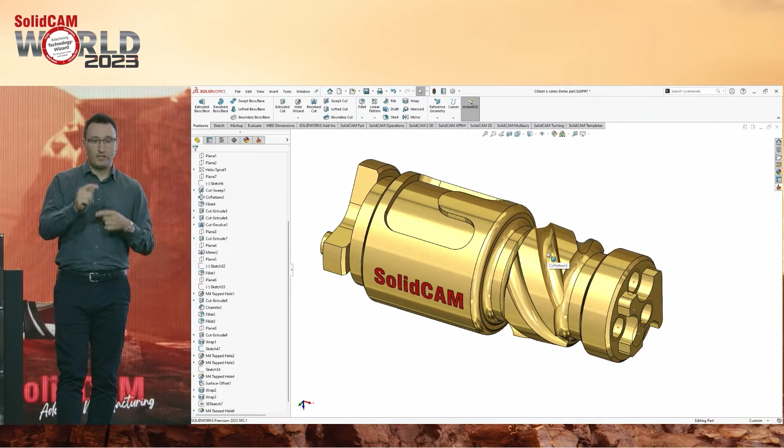So I'm going to open SolidCAM, and I'm doing it the standard way. Do you want to save it? It's not saved - okay, I hope that's fine. So, pretty standard, I'm just going to make a demo solid, and we just click OK. Standard, nothing too special.

The very first step, you all know, I always mention - whenever you have SolidCAM and all your machines on the floor, the very first step you need to do is select your proper CNC machine. Here is the list of all your machines that you'll have on your floor.

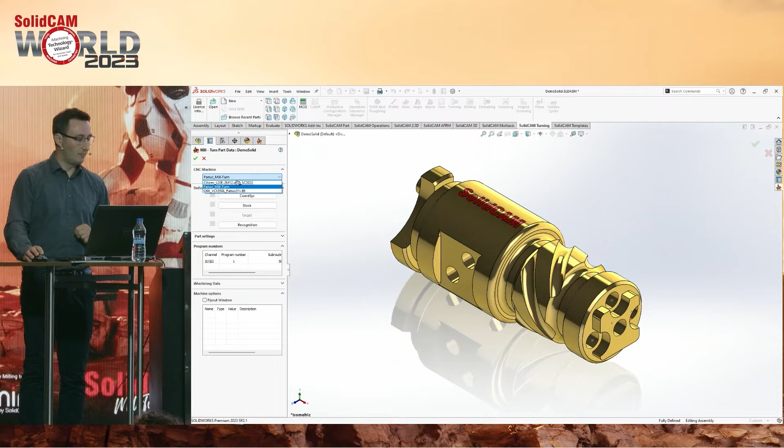I'm going to pick one of them. In this example, I'm going to use the Citizen machine, the same one that's also in Schramberg at the Technology Center, the one with the ATC. So it has the spindle with automatic tool change, together with the B-axis. You've probably seen this on many of these videos shown here.

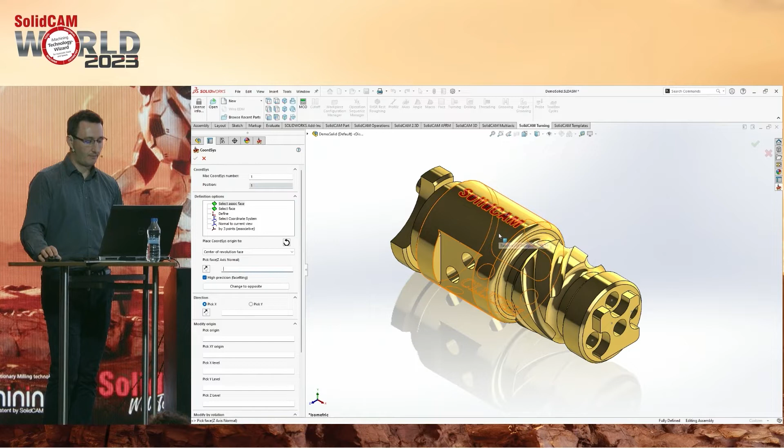And what's very important, I'll pick and select the coordinate system - it'll be there just for programming the way I like it, so my x-axis goes towards some geometry. It's not really necessary to do this; I'm just showing that any kind of manipulation with the coordinate system is possible. Many of the elements I'm going to show, I'll show shortly because of the short time, but it's important to show that any coordinate system manipulation is possible.

Now, what you'll see in the next moment is all automatic. Customers like to see something happening in the background, but while this is happening, try to explain to them what's happening - so the coordinate system is automatically created, stock is created for you, and the envelope is automatically created.

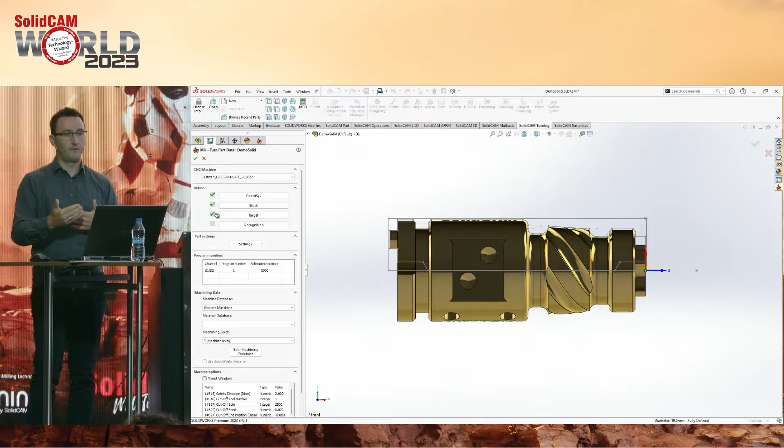You can see at the left that everything is done already, per your settings, you don't need to do anything. He always worried, but I want to change something. No worries, if you want to do something manually, you can always change that inside the settings.

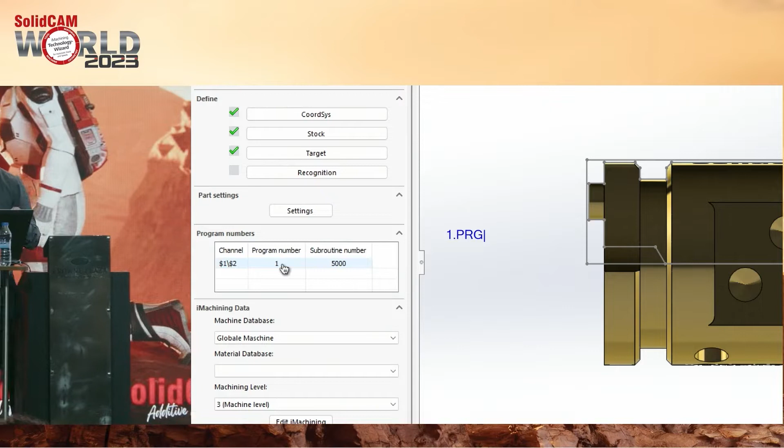What you have here is the program number. Whatever you type here will be the PRG. This is a small moment where, when you know that this is Citizen, you know that the output will be PRG, and then you connect it. This is a small detail, but he immediately speaks with someone who understands also the machine, so now you are getting connection with someone who is technical as well.

Now we have here also some machine options. I will not bother you with them, but it's good to show. This is important, okay, so you explain him. So you need to also have a technical guy who knows the machine well. I'll just click OK, and that's all you need to do. This is usually the process of just 10 seconds, and that's it. You don't need to do that all the time.

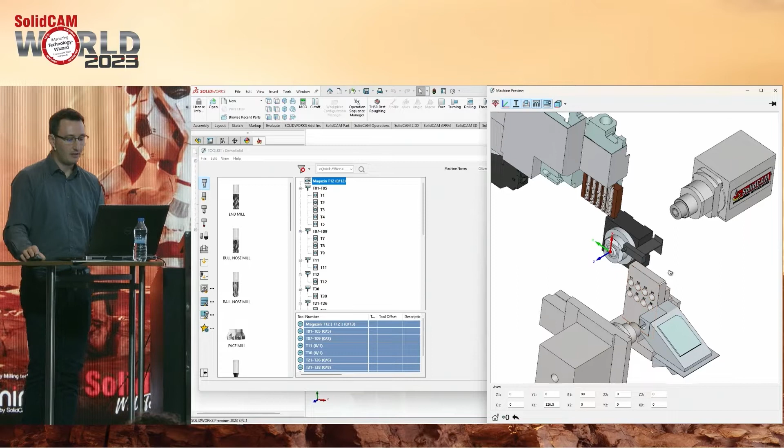The next step, I like to open my toolkit. Inside the toolkit, I show the machine. Machine preview is something that none of the CAM has. This is your true kinematic of the machine, and at any step of your programming, whether you are in the toolkit, in the job setup, or in MCO, you have a possibility to open machine preview. It gives you the kinematic position of your machine and allows you to define anything you want in the machine environment.

And then he says, okay, you see, there's no tools here. What is important, and I mentioned in yesterday's presentation why our toolkit is the best in the world, is because it has such an easy way to manipulate with the tools, fast change any tool layout. This is extremely important in the Swiss.

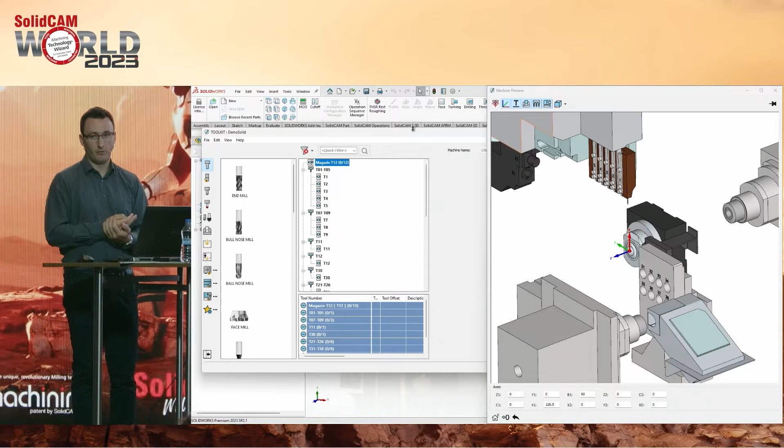What I'm going to do, I'll just load it. I have predefined this, and with a simple click, mount all tools. Maybe you can all see it over here. I will unzoom it, please pay attention in the machine preview.

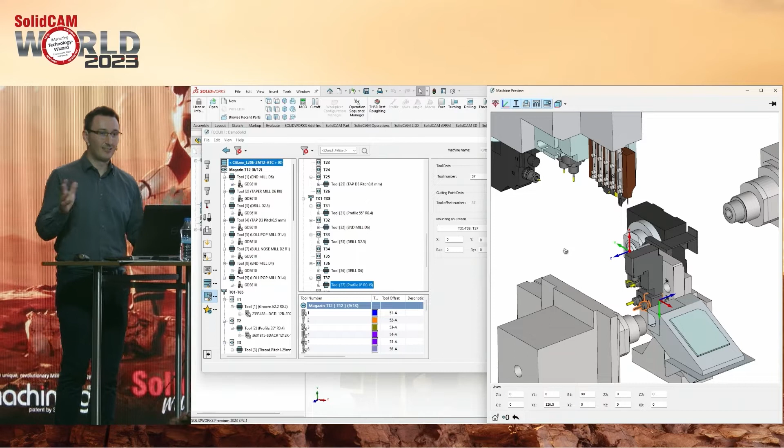This is already, they say, wow. They're already impressed here, but don't stop here, there are so many features that you can show that can be used.

For instance, you can say, you see these 3 tools over here? 2 tools, but 3 stations. If you're willing to exchange them, no problem. You don't really have to click on the tool itself, you can click on the holder. You have this option, select tool components, which is going to highlight the specific component in your library, and of course you can select the whole assembly.

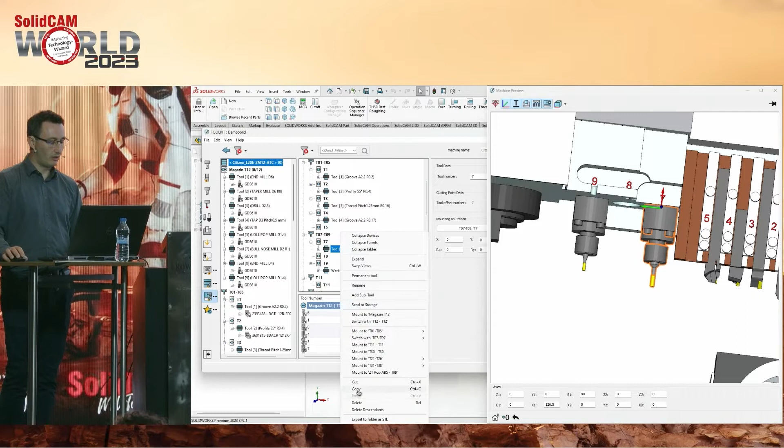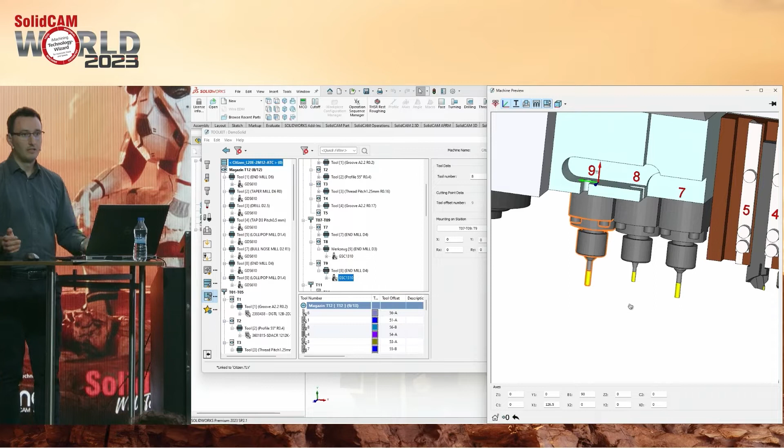So you want to put it on tool number 7, just drag and drop, and now it's on tool number 7, okay, that's fine. But look, what I want to do also, I can just copy, I can do paste, it's so simple. But what if I want to exchange number 8 with number 9? No problem, just go to 8, you have it here, I want to exchange it with number 9, switch it. And where is it? Ah, here. Done. So this is what customers like, that easily you can switch your tools.

You can do that also for any of those over here. I can just select it, just move it to the 34, no problem, there you go. So easy switching layout, customers don't like to waste time switching the layout.

What you can also show, I want to change the diameter of those tools. So this is not what I actually like to see here. You can show him that this is everything, it's live, so everything you do is presented live in the preview. Okay, so this is the tool layout that we are going to use in this demonstration. All right, so that's it.

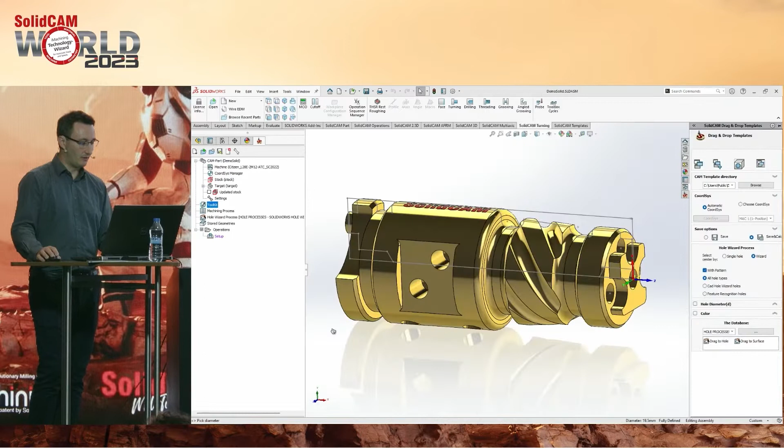So the next step is the setup. Inside the setup, we are talking about the machining length. So here's your part, going to the maximum machining stroke, and I can tell him, hey, what will be your Z limit for your per stroke? Here it is, you can dynamically see it.

But not only that, you can also see where you are going to clamp your part on the subspindle, for which I'm going to use the MAC-2, and dynamically just place the value, and here will be my catch-up position. This will be extremely important when I define my MCOs, you will see that later on.

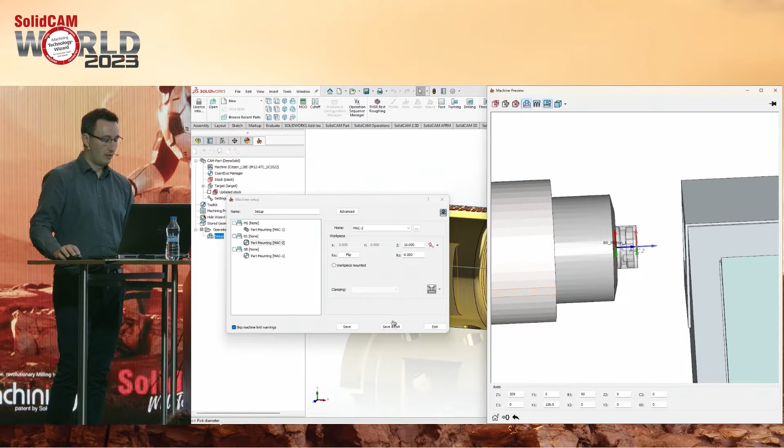And exit. At this point I stop because I try to explain, although these steps can be done more or less automatically, with simple clicks in 10 seconds you already start doing your operations. But for demonstration purposes, I'm trying to tell him, look, this is what we have, these are the steps in case you want to do something, change also manually.

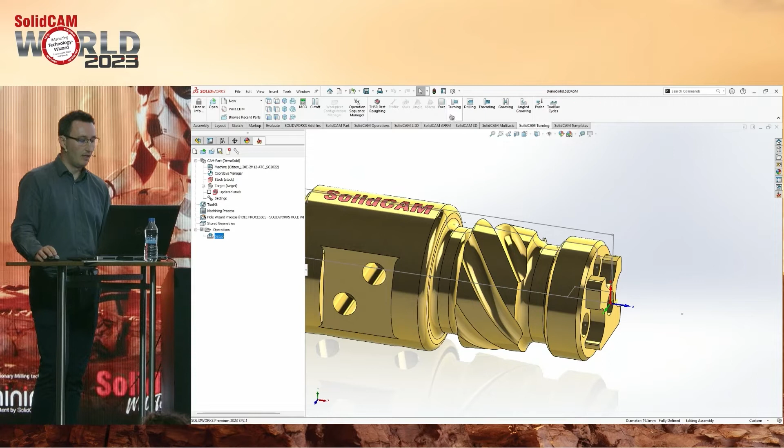As there are so many geometries here, it will be completely unrealistic that I define all of them. I could use automatic features as well, but I will just define some of these geometries, not all of them, but to emphasize our integration and associativity. I'll go through the interface, showing that on top you can find all the SolidCAM operations, starting from 2.5D, automatic feature, 3D, multi-axis, turning, and I start with simple facing.

Every one of our operations in SolidCAM is within this single window. No matter what job it is, it looks pretty much the same. Only the parameters of each of these segments change. So let me just define simple facing.

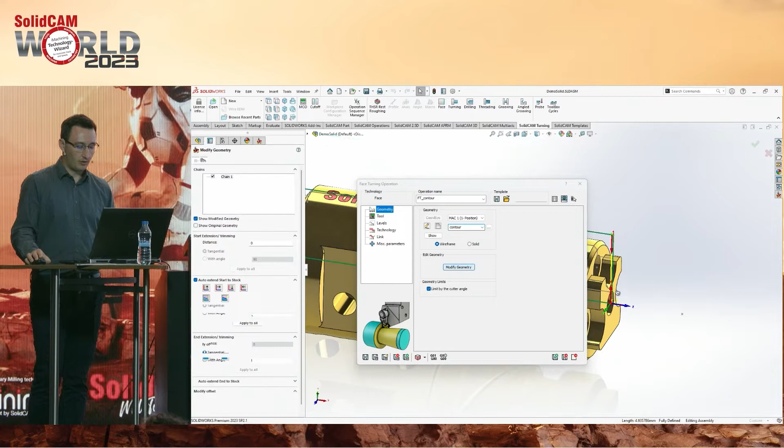I'm just going to accept it. I'll make sure that my geometry goes all the way to the bottom with auto extension to the end stock, and I'll click OK. You may also change the operation name, and now it's time to pick up my tool.

I am showing this also, I showed this also yesterday. You can pick any tool, not going through your tool page and just select it, which will bring you to a toolkit. That's fine, but it is so much more convenient. You know, Swiss-type machines can have 30, 40 tools, so you have a huge list, and finding a tool in the list is not convenient.

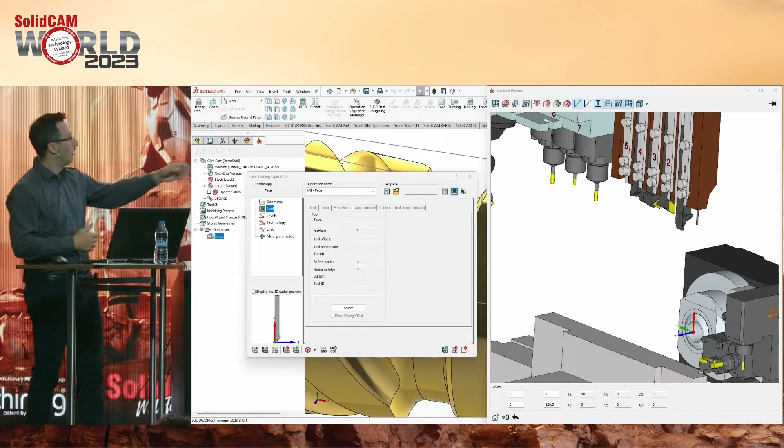Use the advantage of machine preview. You can just easily right-click, select tool component, and it's going to pick the tool and show it here on the left side. It's done, and that's it.

Let's go further. What I also like to emphasize is our parameters and the picture, how intuitive our software is. By just going to any of our parameters, I don't even need to click it. You just move your mouse over it, and you see at the bottom the picture that describes this particular parameter. SolidCAM has at least 5,000 images which describe each particular parameter.

That's intuitive. Yesterday we've seen that we also start to support movable pictures, GIF files, right? So we will work on that as well. I go to the technology, I can go to any of these parameters and convince the customer, look, anytime when I move this, it changes, right?

What you can also do, it's easy to learn. I mean, yes, it is intuitive, but if you want to find something more, there is online documentation for you. So on the top you will find this question mark. You can always click on this and move to a particular parameter.

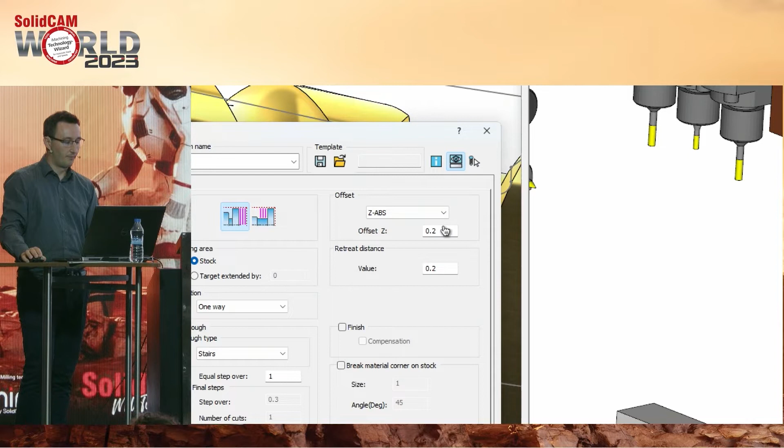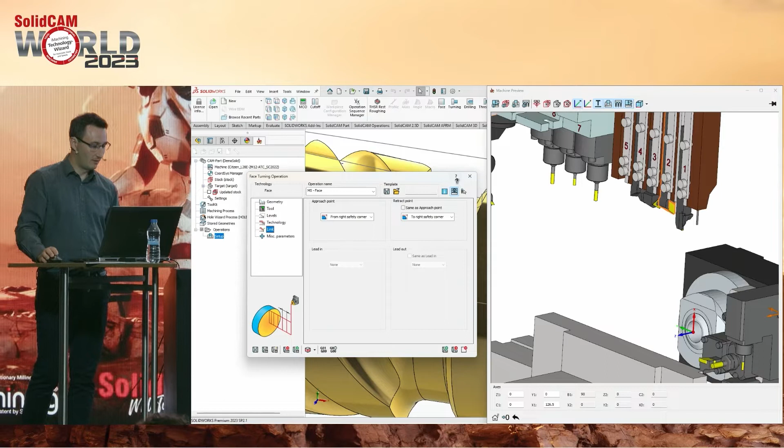What, I don't have the internet? Let me try again. Apologize for this, it should probably work because there's internet. It should guide you, let me try again. It didn't work with that parameter, but if you go with the question mark to a specific parameter, we will drop you to the specific section where you can find more information about that parameter.

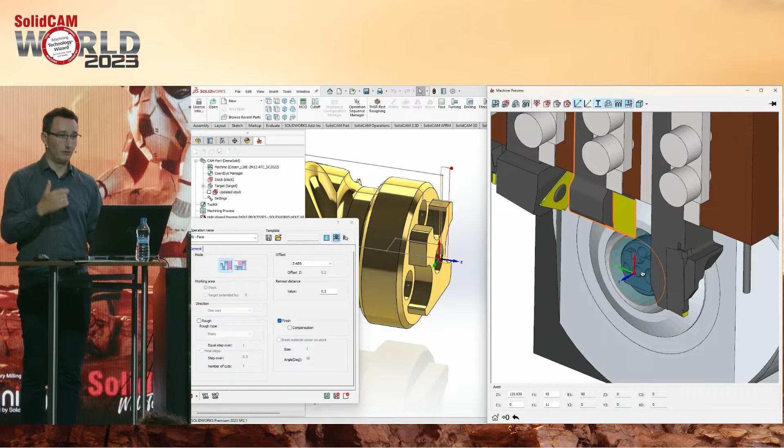All right, everything is defined. I will just go with the finishing, save and calculate. What is interesting happening at the moment is, hey, look at this, you can dynamically see your toolpath. But you can also see where this particular tool and part is at this moment kinematically in the machine environment. Again, emphasizing the machine preview feature.

Right, let me define a few more operations. I'm going to go outside diameter turning. I'll do this a little bit quicker this time, but I will define it with a solid. I will click on this geometry, for instance, one of the last.

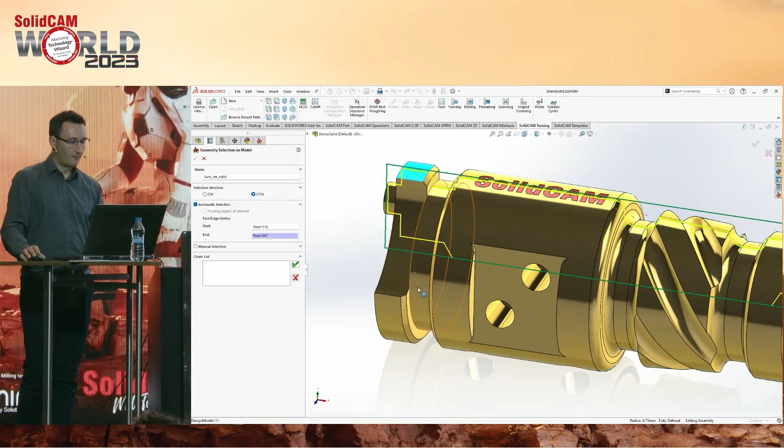Maybe I don't see it here, let me try it again. So over here, I'll click on this. There you go, so all this chain is selected. Don't worry, I'm not going to machine all of this, but I have a possibility to modify any particular geometry.

This is extremely important if you have the guide bush. The guide bush moment is important as every collet can be a different size, of course. So you cannot really machine the complete part within, let's say, one operation, okay? But for this demonstration, I just mentioned this, and I'm going to, of course, clean the whole part.

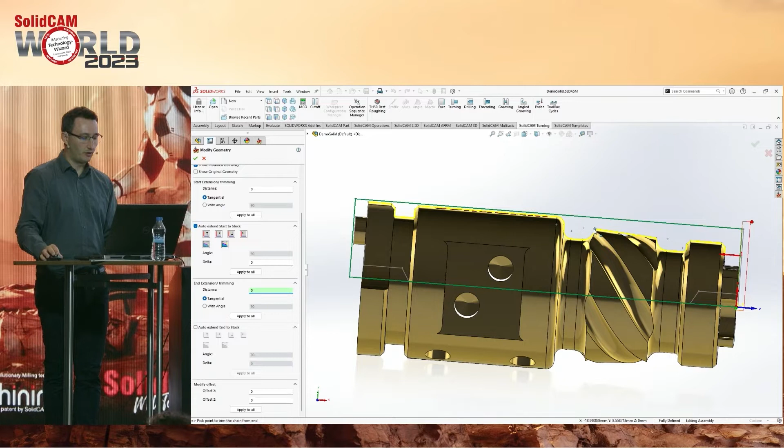What is important to show is that you can just go over here and trim your toolpath to any point. Look, just by clicking, it trims your toolpath. I can just go over here and click over there. That's good. Now I can go and also auto-extend my stock within the angle.

I can say here -10, which is very nice to finish some geometry. I'll click OK. I can also mention here it's OD turn. I can go to same of my tool. I will just reselect it.

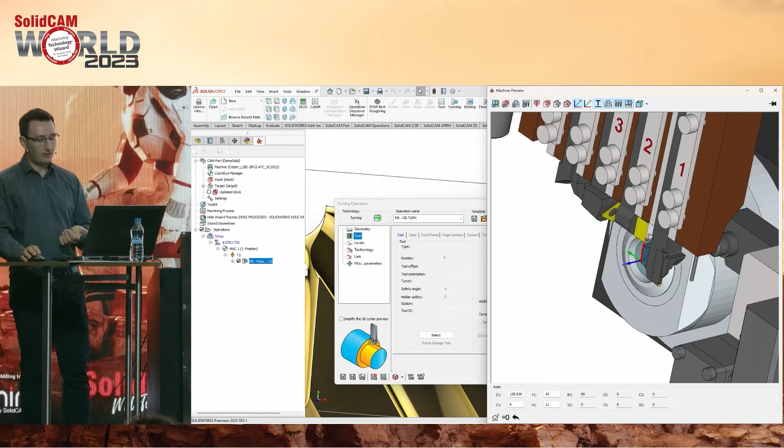Here it is. What is interesting also to see here, is that my next job is not even calculated. But what I can see at the moment is that where my operation was before I selected.

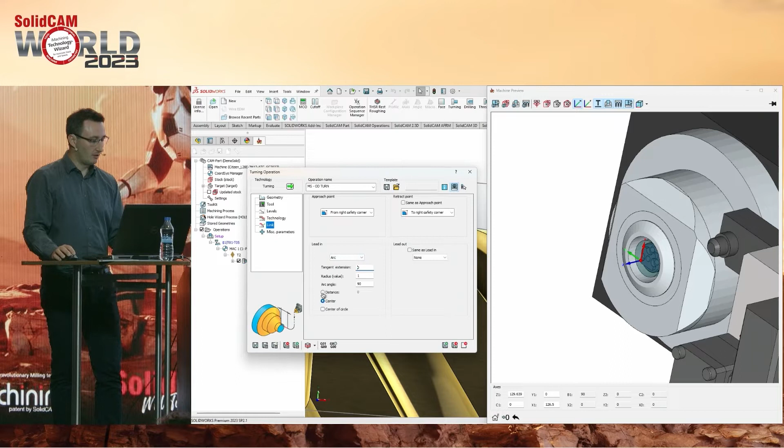I will just this time go to the technology. I will do it with rough, make corrections - this will be all fine. I will not change too much of the things. I will do it with the finishing. I will go to the link. I will do approach with the arc and hit save and calculate.

It's so easy. It's so nice, right? But what we can do more?

For instance, we have a very nice option here in the technology. If you go to the general, for the guide bush purposes, there are sometimes situations when you really need to go more than allowed by the collet. So in such cases, you need to break the corner material on the stock.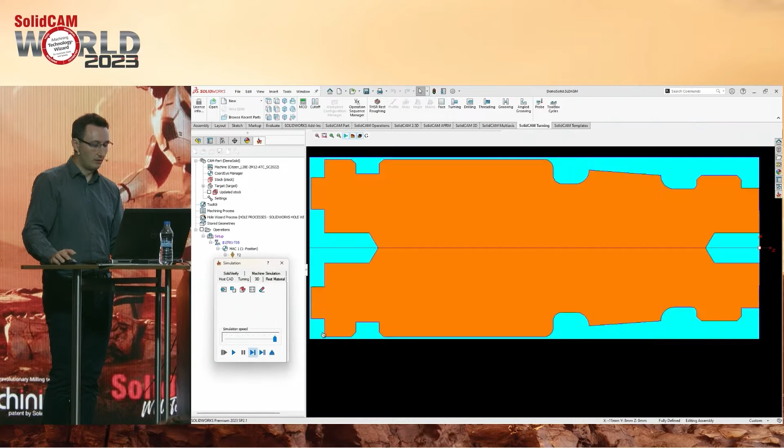And that's so good that we have this option. I really like it. You can put any parameter here, and it will really cut. It's like so. I will simulate it. I'll go to turning, make a simulation. I will just run it fast.

Here it is. I have this break over here. All right, so what I can do also, I can just say non-descending mode, no problem, calculate. It is so fast. It will not go here to those things, right?

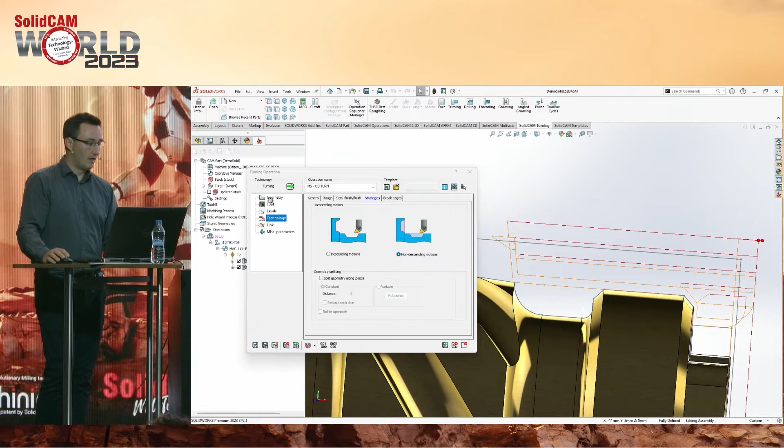I will go to the geometry, modify geometry. I want to now cut all this geometry, just click OK. Because of the time that we have, I'm just going to machine all this stuff here.

In addition to this, I'm going to make a grooving operation. I'm just going to turn off this job. And I'm going to select from here to here. This is my first chain. This is my second chain. And my third chain.

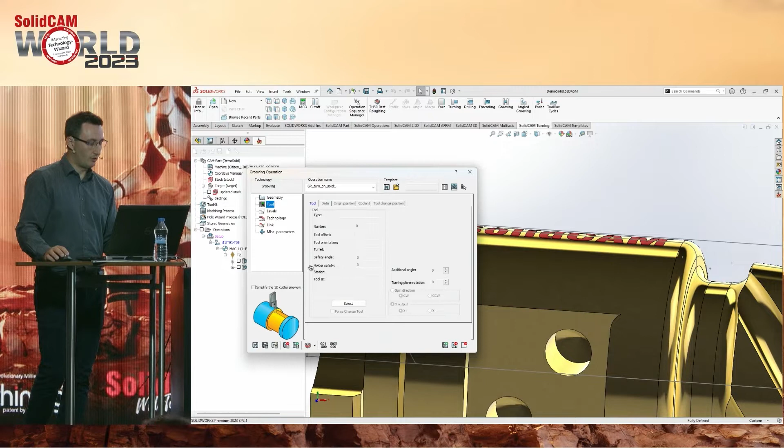Perfect. Again, I will go to my tool. I will select, but this time different tool. I have the tool over here. What I didn't mention here is that all of these shanks - you see that they are 3D model imported ones. Good also to show during the demonstration. I'm going to select it.

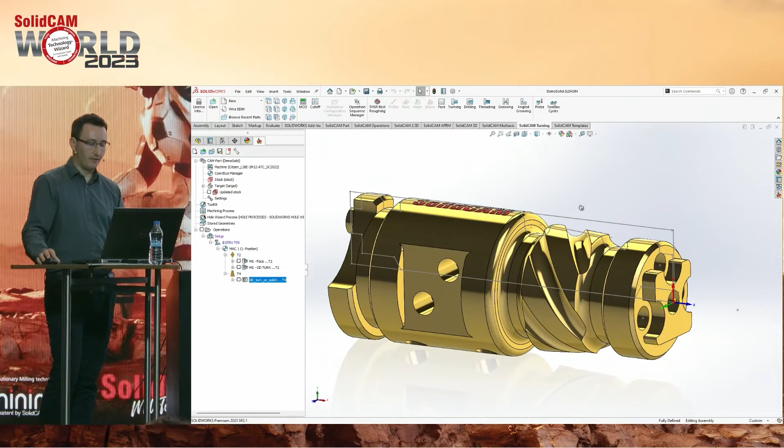Okay, so where we go further, now you start to say, look, but we have so many milling operations. Let me show you. I always like to start with the one from the face. And I will go to our 2.5D, and I'm going to use our pocket.

All right, I will click on the chain. I want to define this with a chain. And what you need to do is simply click on the surface. It's going to find all of these. I don't need to do anything special. So, trying to show how easy it is to do this.

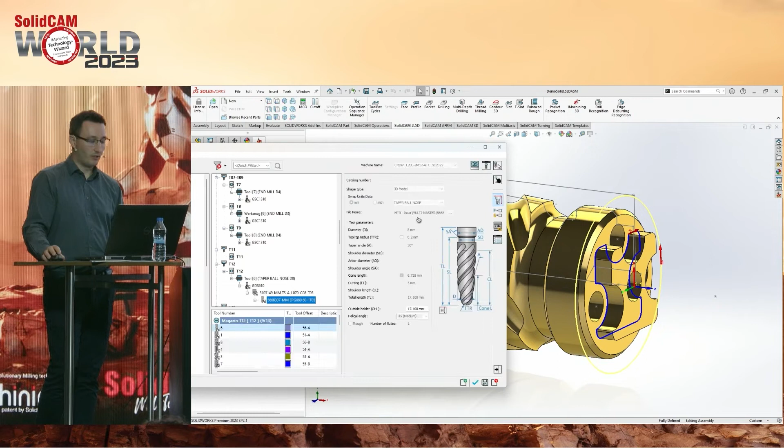But this time I'm going to do this with the B-axis. My B-axis, here I'm going to find a tool. It's here on the top. 4 diameter end mill, like so. I'm going to open my preview.

Here it is. I will go to my levels. What you can see here, I have my upper level and I have my pocket depth. Both of these sections are green. Make sure you emphasize on your demonstration: hey, why is this green? Can you guess?

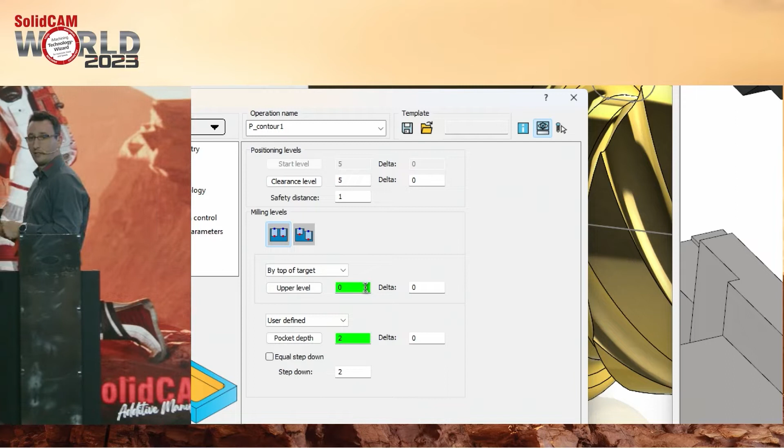And he'll say, oh, you define everything correctly. No, no, no, no. It means when I click on these particular surfaces that they are associative with this geometry. As he said, what is associative? You will see very soon.

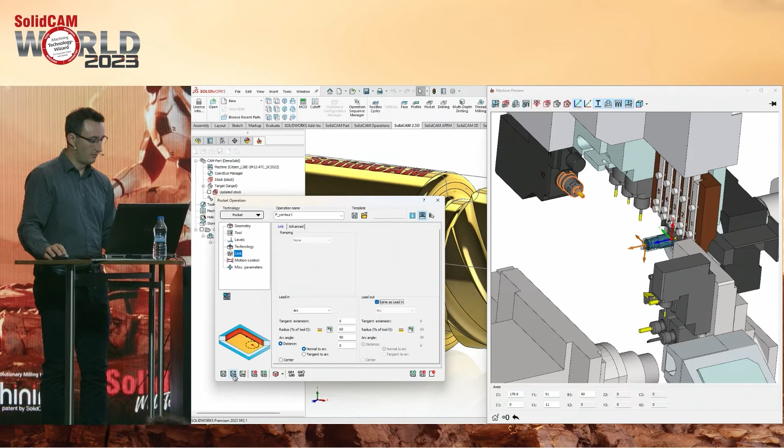So I'm going to calculate. I think nothing - oh yeah, I'm going to just define the finishing and wall finish only. Maybe some link, arcs approach, same as the lead-in. Calculate, and the B-axis on the spindle is used. Showing the toolpath - the toolpath is here.

All is good. And now, what I usually like to show is, okay, I have one from the face. Good. Hey, do you have a polar interpolation cycle? And he said, what do you mean? Do you have a cycle in your machine G12.1? Oh yeah, I have it.

You want to run it on this machine? Yeah, but I never tried with a B-axis. Yeah, we can do it. We verified that also - the post-processor supported it very well. Oh, I would like to try it.

So you go to the motion control, just turn on the fourth axis here. Just click it, and you can already see that it repositioned. I can calculate and say, can I see a G-code? No problem, I'm just going to generate a G-code. Click OK.

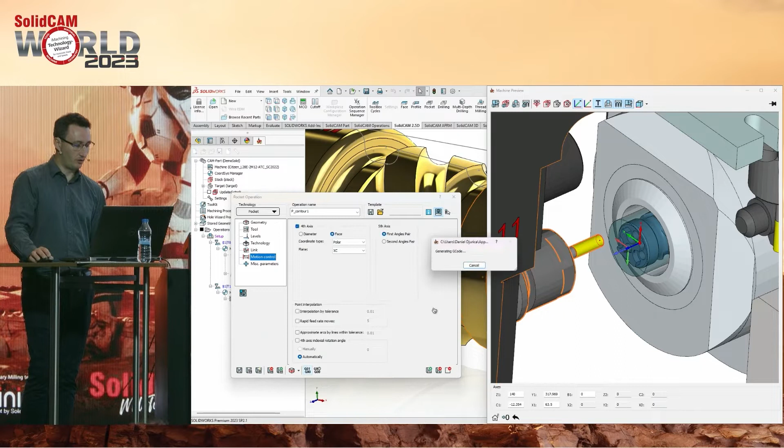And your G12.1 cycle will be there. He'll say, wow, this is amazing. Okay, you don't want that?

No problem. But you also have the option to control any of your C-axis positions. Here at the bottom, this job is currently on C0. If you want any other angle, just put in the value and it will be there. At the bottom, you can see the C-axis gets updated.

But that's not all. Now it's time when you create the first milling job, it's time to show drag and drop. I want to show you something you've never seen before. We define this job over here, but I would like to define this job on this surface.

I don't need to create any coordinate system. It is done.

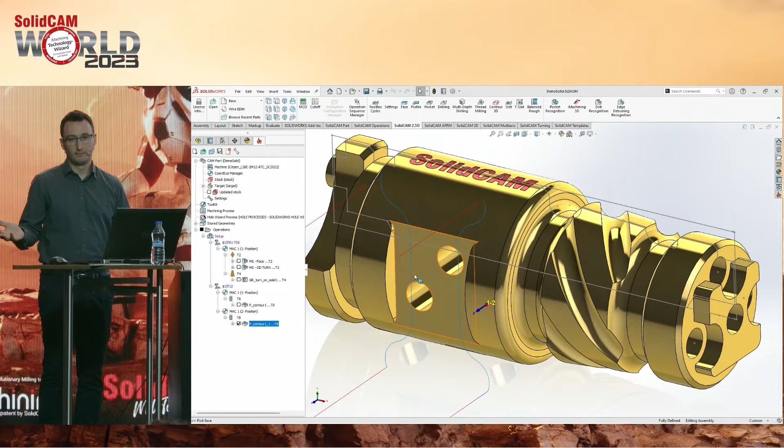What you can eventually do, maybe you don't want to do it with your B-axis. Maybe that's also okay. I will disable the preview.

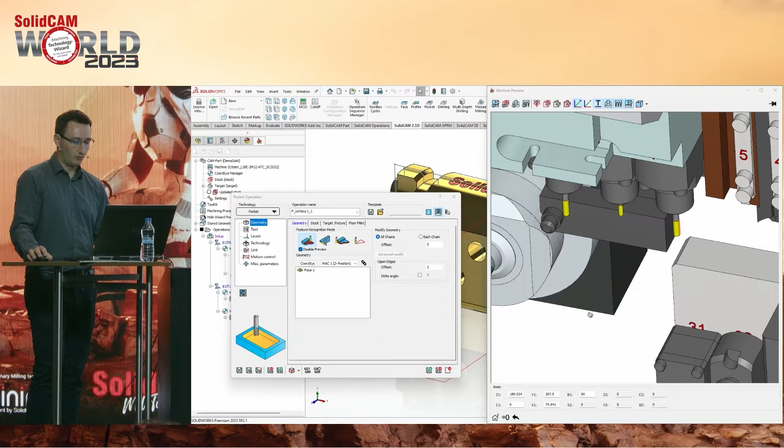But for instance, I would like to take this tool. No problem, I'm going to do it with this one. Save and calculate. There you go, now I'm using this tool for this specific job.

Okay, what's next? Two jobs, it's okay, let's move forward. My next job will be 4-axis simultaneous. Now this is a very simple geometry here, indeed, but there are a couple of things I'd like to mention when showing the 4-axis.

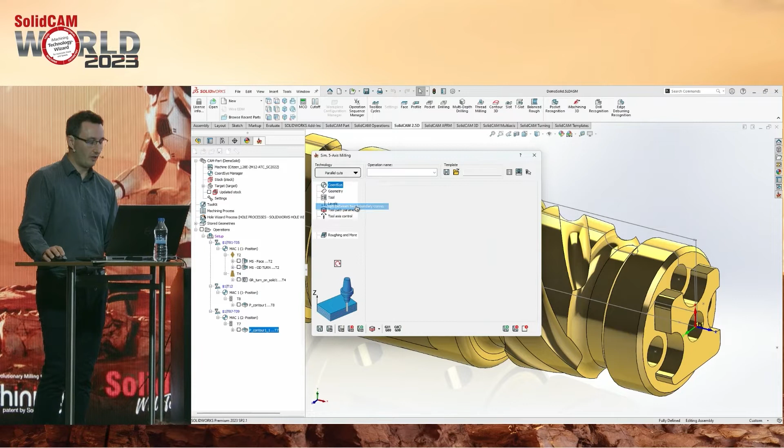Every customer knows how the 4-axis toolpath looks like, that's sure, but let me mention a couple of technical things here. I'm going to do morph between 2 boundary curves. I'll click on geometry, it's clear that my geometry will be this surface.

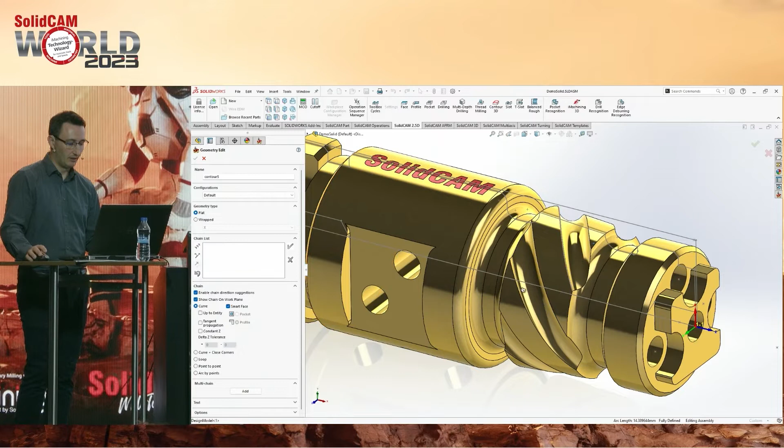I go to my tool. I'm going to select my bull nose mill in this case with the B-axis. Is it this one? Yep, exactly this one, I'll accept it.

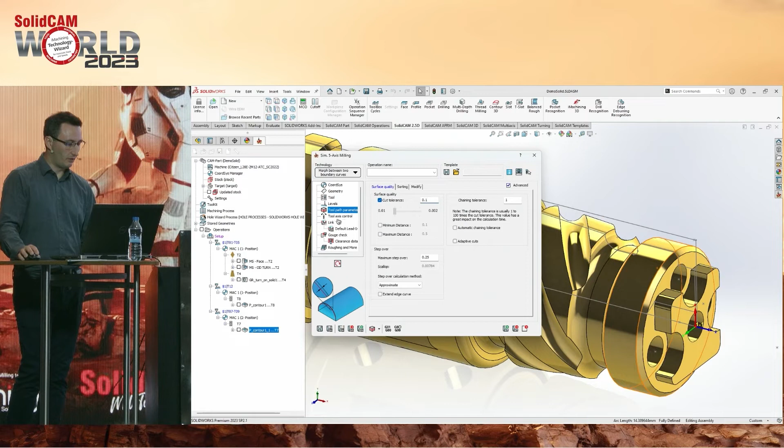I will change mine to the cylinder, going with a radius of 10, or maybe 12 I can do, 2 here, 0.25, cut tolerance. Just for the calculation time, I'm just going to reduce it. Rotary, point here,

and just calculate. Let's see what is the toolpath. Pretty good, not so bad.

Of course, what I'm doing at the moment is calculate the toolpath, add some lead in. So how difficult is it? No problem, just use the lead in. Here, I don't want to use a default, go to vertical. Look, save, calculate, it is there.

You can, of course, I have these retracts. I would like to get rid of it. No problem, let's go here. I would like to do a one-way.

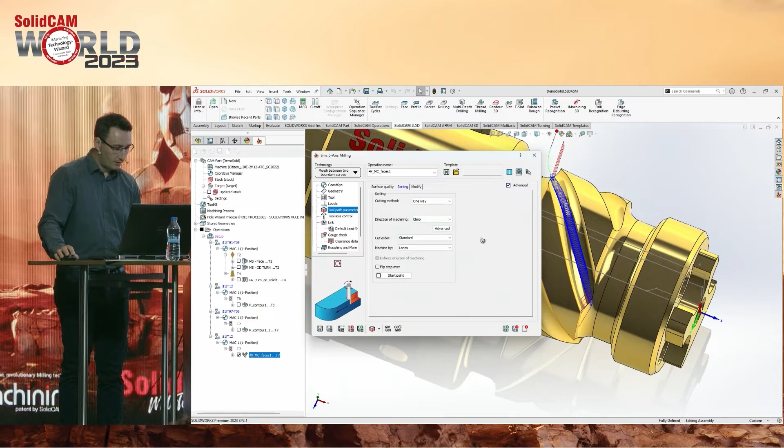I will go with, let's say this is okay. I will just say calculate. I want to do it one way. This will be fine, and if you're satisfied, I go with the roughing.

And I want to do a depth of cut, 2 here, 0.5. Calculate, and show him this toolpath.

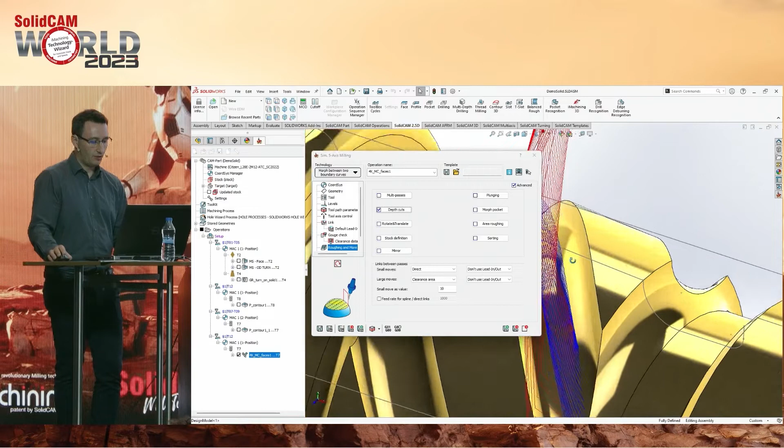That's it. Okay, I want to also rotate and translate, no problem. I'll do it 5 times. My rotation angle is 72. Calculate, done.

Okay, so what is this technical stuff that you want to mention? You know, usually Swiss-type machines come with a very small memory. Just generating this G-code will take about 20,000 lines of code. Very often customers are buying a machine that doesn't have a huge memory.

So it's important to show that, hey, look, there's something here that we can output as a sub-program. This is very important to mention. No problem, calculate, generate the G-code.

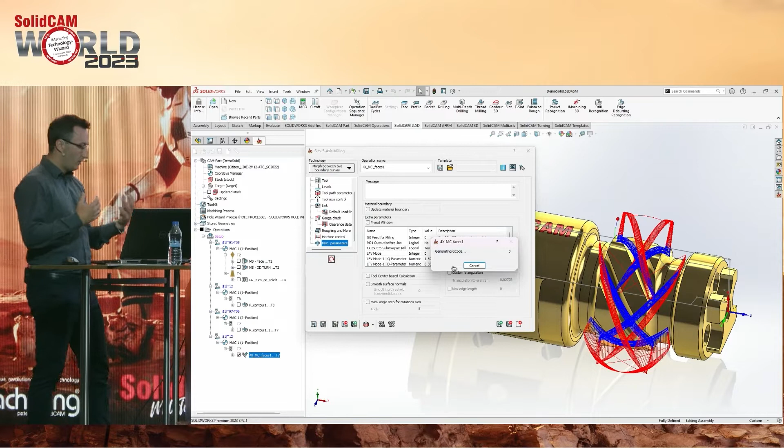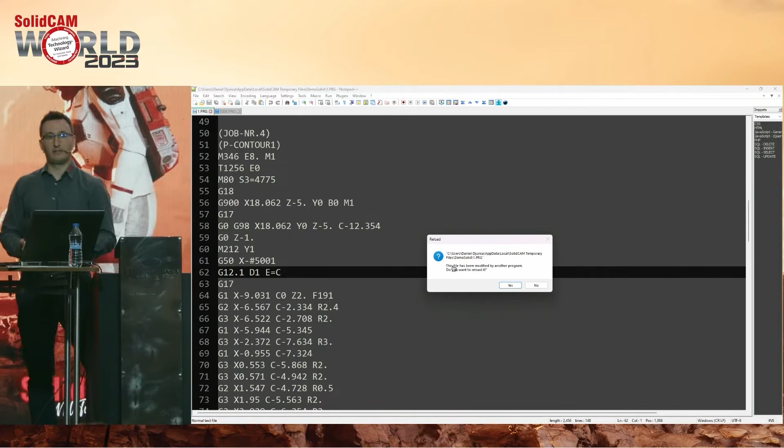And what you're doing here is, hey, maybe he's never run any huge G-code, and now for the first time he's going to see thousands of lines. Obviously this is the 4th axis, but he's never run it from the CAM, right?

So I have the main program, you show him the main program. Here I'm calling the sub-program, and here's the sub-program. So those are small technical details that also buy a customer's opinion, okay?

Do we have something more? Yeah, there are more jobs that I can add here, of course. But let me go towards the MCOs.

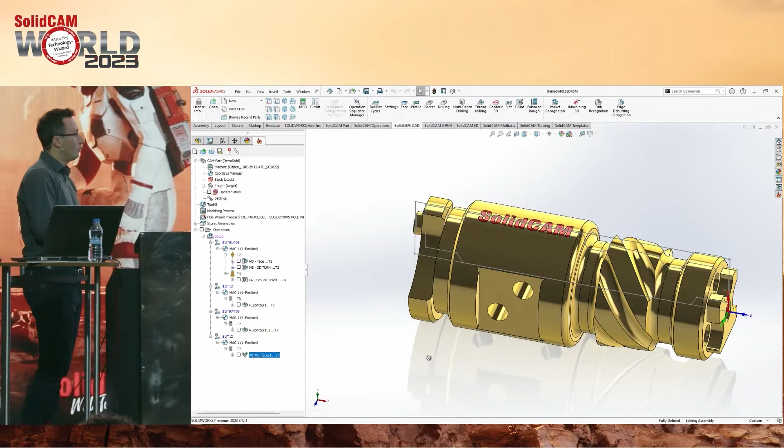In this process, I would like to make a cut-off operation. Of course, Swiss-type machines are very complex. You need to turn on the spindle synchronization at the time when the part is clamped. You need to turn on axis synchronization—it will go into superimposition mode. A lot of things. This is something the customer considers, like, okay, I want to define it very fast. I don't want to lose time with it.

You can show him that he can create a process template. I'm inserting all of this stuff with a process template I already prepared, and I have the pickoff cycle. All of these operations are there. I'm just going to click OK. I have one cutoff operation for which I will not define anything—I'll just click OK, and all these MCOs will be there for us. And say, whoa, here it is.

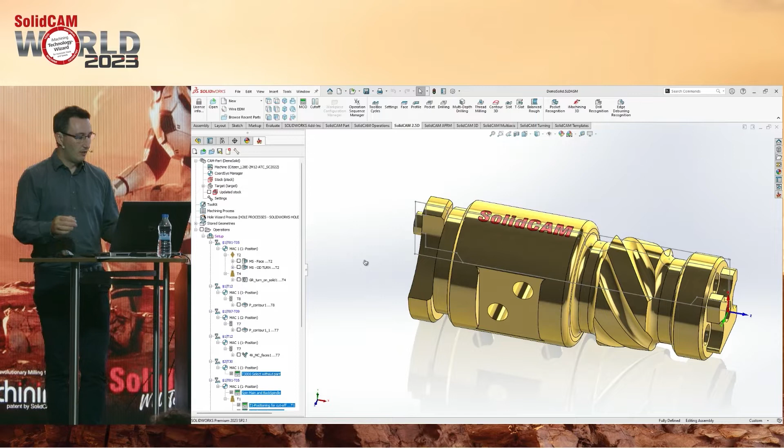That's all. I will go through these MCOs a little bit to show you what they are. But for this, I have one cutoff operation for which I'm going to define a job. I want to do it like so.

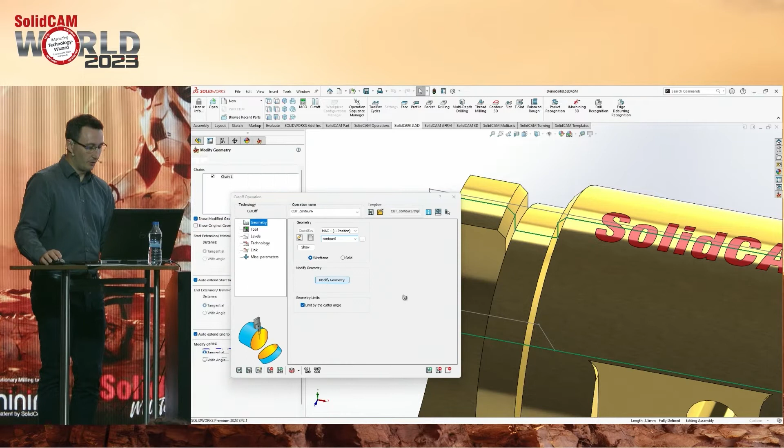I will just modify my geometry, make sure that it goes all the way down, click OK, select the proper tool. On most of the Swiss type machines, the tool is number 1. And the offset is 0.27 calculate.

All right, here it is. Here is the job. So what are those operations here? Let me show you a couple of them. I will go to the Z1 positioning for the pickoff, and what we always offer is our MCO operation—we always give a user all predefined MCOs for a specific machine. This one is Z1 prepositioning, and again, what is good, you have your machine preview.

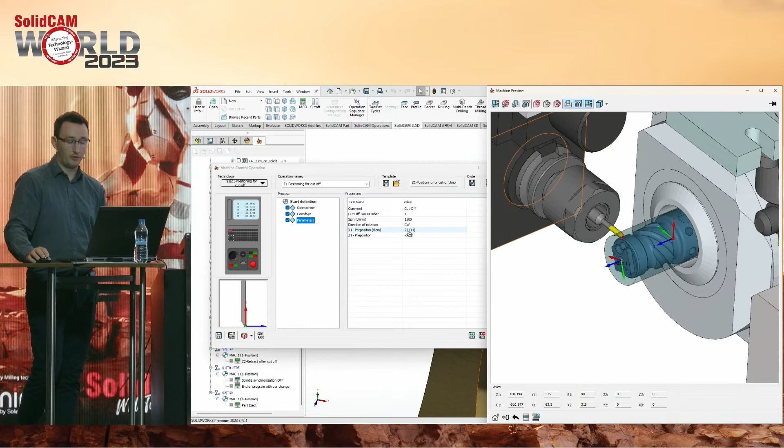What we always offer is the last position of my previous tool, and what I would like to have is my preposition on the X, which is 22 in diameter, and I have a Z1 position of 50.2. My part is 50, so I go with 0.2 as well. So I'm just going to click—there you go. This is my predefined cutoff position, and that's it.

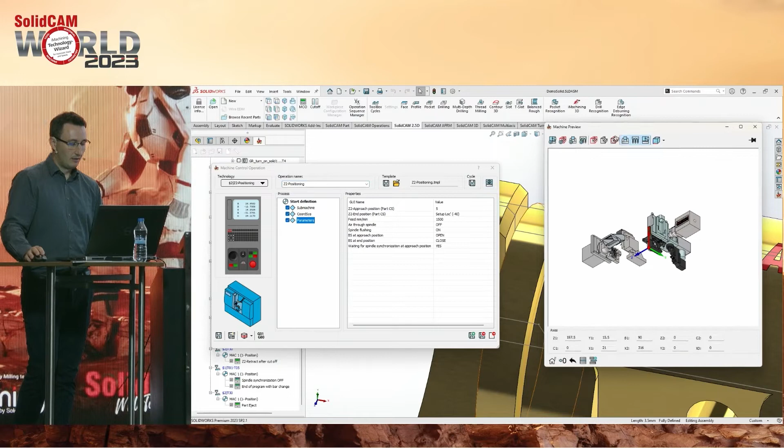Okay, so what is also interesting? Z2 positioning—look at this. It's my pickoff cycle. My part is ready. Everything is okay. I have here a position, pickoff position, 5 millimeters exactly. I'm pretty sure that this will not hurt anyone, so I can go 2.

Oh, I have my end position, which is my setup location. I said, what does this mean, setup location? I go and click and show him—do you remember my setup when I showed you that this was like 10, and then, oh, this picks automatically? Yes, absolutely. So you go to your setup, you remember this parameter, okay? So you want something else?

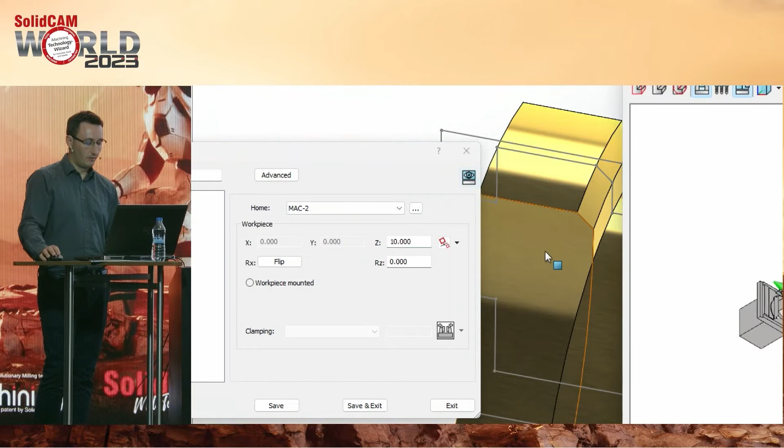No problem. I'm just going to zoom to the part. You can also use this icon, by the way—it's very handy. So you can just click. For the sub spindle, it's here. And I'm going to change the position, obviously to a different clamping position.

I will go to my prepositioning parameters, and hey, look, it automatically changed. You don't need to do anything here—everything is done for you. So, automation. I click new clamping position. And for the end...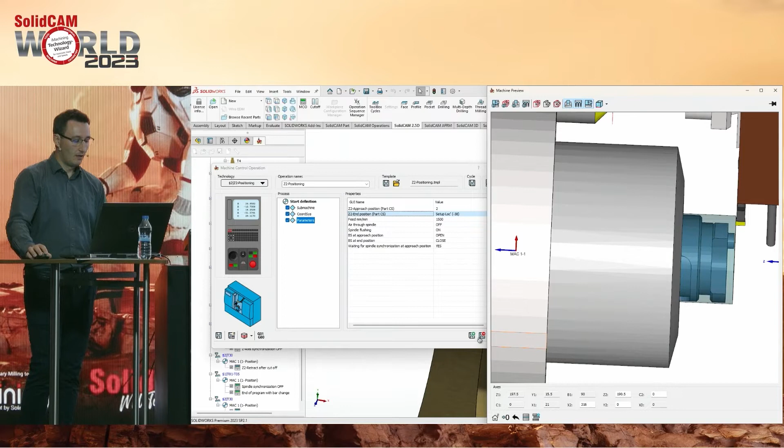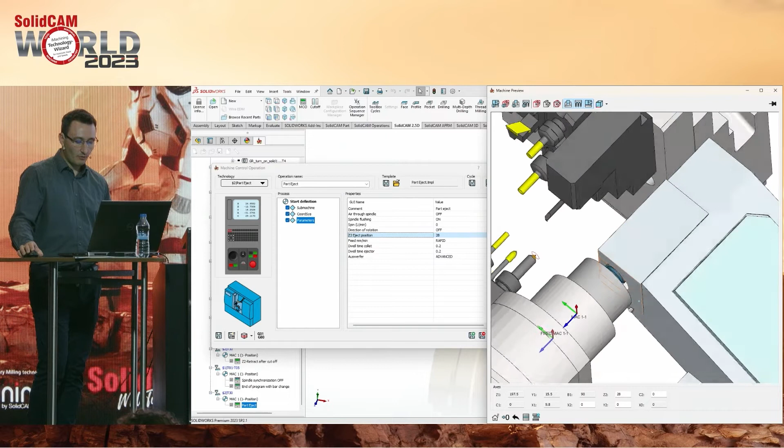There are a couple of jobs that I'd like to do on the sub spindle—everything's fine, but I'd like to show the part eject here. Also, we have the part eject, something that Swiss type users like to see. My part is successfully transferred, and I have my eject position, which is over here. I can change it to any value that I want, and it will properly change the G code.

So this is more or less everything that I showed to give the user the feel that, look, this is fast programming, very intuitive, easy to use. I will, because I changed the setup, just recalculate those jobs over here. And what I have is the sequence, operation sequence manager, something that you need to show.

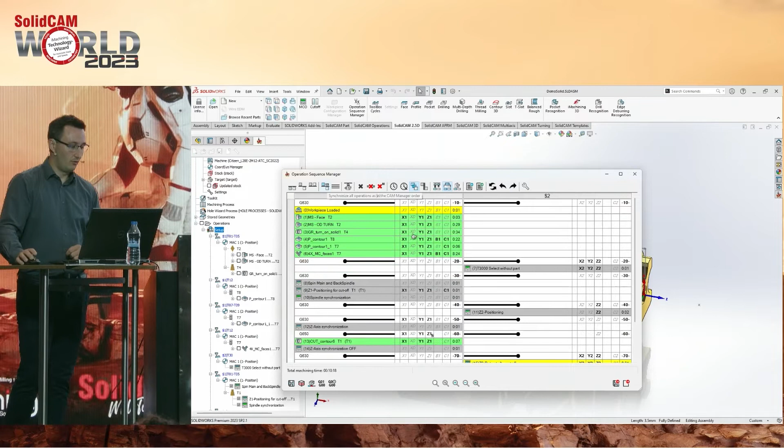So this is how it looks like. Hey, you know what it is? On the left side, it's everything you do on your main spindle—this is your channel 1. Anything you see on the right side is your channel 2, everything you do on your sub spindle.

We have the axis patterns. You see these black lines? This is how your machine communicates within the first channel and second channel. You call these wait marks, wait codes, however you call them. So this is the way to communicate with the customer.

So you want to also see 2 parts? No problem—right-click, add a new workpiece. I'm going to delete this wait mark; I want this to happen simultaneously while I'm working on the main spindle. And what you have here is right-click, also axis patterns. They are automatically defined; in the case when you have more options, you can also change them to the proper one. As for the Citizen, this would be the proper one. And as there are no clashes, I am able to simulate it and generate the G code.

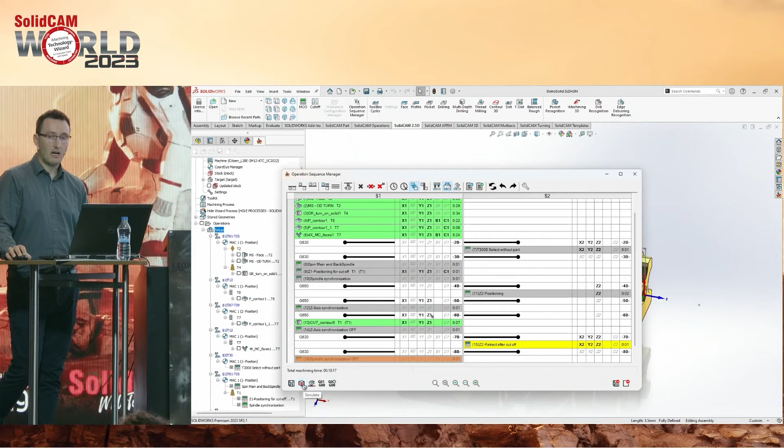Also, in the channel synchronization, a small thing I didn't show: at the bottom you have the total machining time, shown before synchronization and after synchronization. This is very, very good and important.

Okay, two things I'm going to show you. Associativity, guys. I'm going to close my part, open this, and I'll change a couple of things, not more. I'll just show the customer that, hey, look, this is something you can do, just like so.

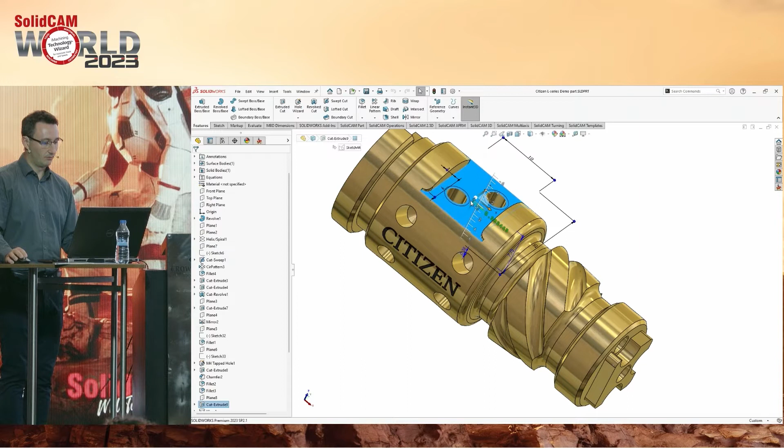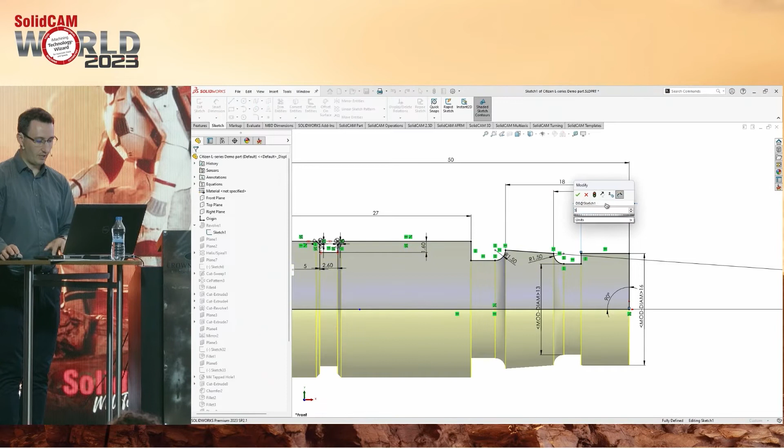It's done, so obviously we have a different geometry here, on a different level. Over here, I have the cut that I'm going to change - it's not 2mm, let me put 1.5. I want also to change my envelope. Let me put something small here so we can see the difference. This will be shorter, let me put this on 5. Yeah, this will be enough.

Okay, so different part, obviously, right? So I'm going to save it and close this part. I explain to the customer what is happening in the CAD design department, also the CAM design department. Those departments can be completely separated - emphasize on this. If he changes it, hey, it's all right.

You open your CAM part, and this is the pop-up message that appears, showing what this means. You changed your model - do you want to use the old one or the new one? You click yes, change it.

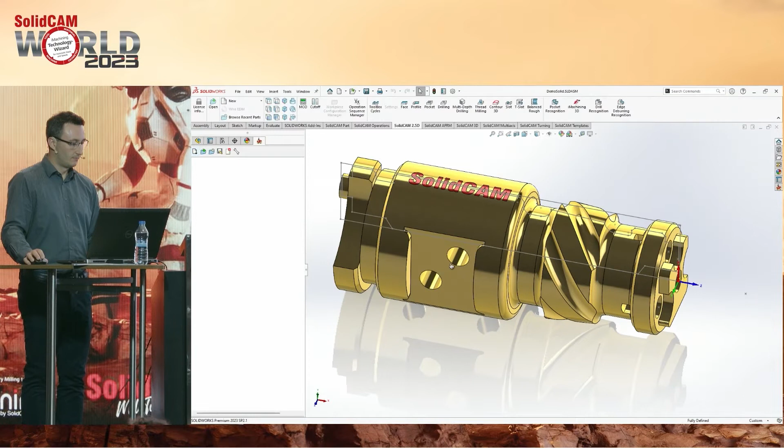All those things you see are jobs that require recalculation and synchronization. Obviously here we have a 3D model that doesn't follow the previous envelope - everything is different. So what I'm going to do is right-click, synchronize. Behind the synchronization, we are going to rebuild our envelope, replace the geometry, and every single parameter which was associative to a model is going to be recalculated. The last step is recalculation.

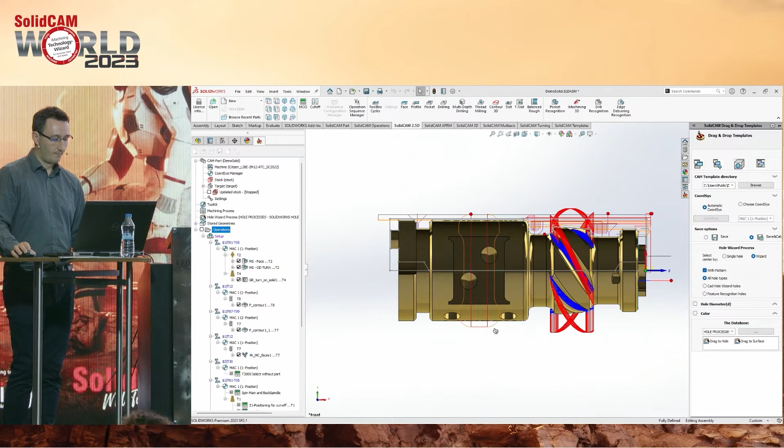Of course we give the user the ability to do this completely automatically, so he doesn't need to do it, but I like to see the process. You can see it, everything is there. So I hope you like it.

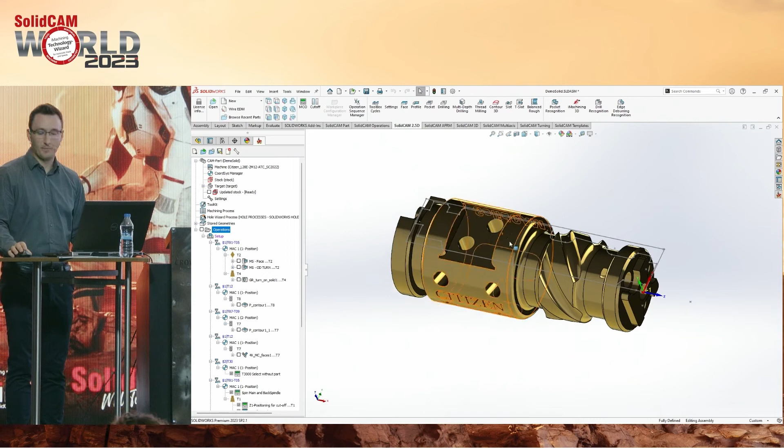And the last step is the G-code generation. I also like to talk about that, but I will skip it in this demonstration. And Emily, you want to say something?

So, absolutely important. All right, and thank you guys for your attention.

Look, I have one bonus thing to show that I didn't show yesterday. It will really take me 2 minutes only.

I was thinking yesterday when I was showing you the fixtures, and you remember this part - just to remind you, we have this collet, right? And I was thinking, okay, I defined this one. Let me just remind you for a moment - so we define here the fixture position, we also define here the part mounting position. Again, something about associativity: this fixture is associative with the one that you've seen in the CAD.

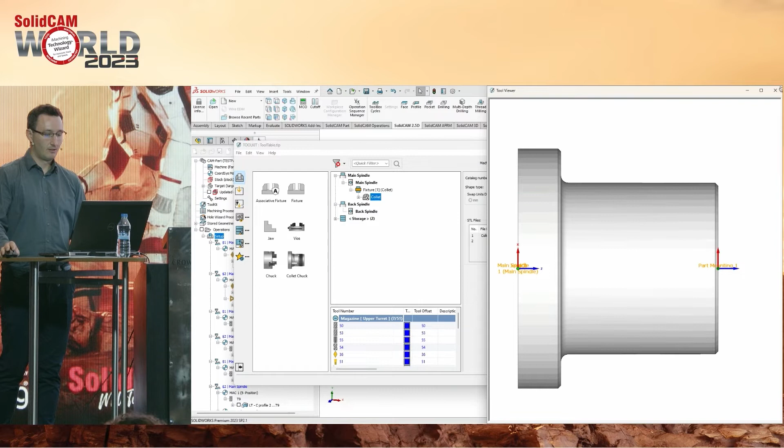So let me show you this. I will close this, and open my preview. This is my setup location, this is my fixture at the moment. I can see my part mounting, it's over here.

Okay, that's all good, but let me show you this. I open my part, my fixture, and I'm going to change it. I have also an equation - you can do this also manually. I'm going to change this, and I'm going to update. You will all agree that this is a different fixture. I'm going to close it.

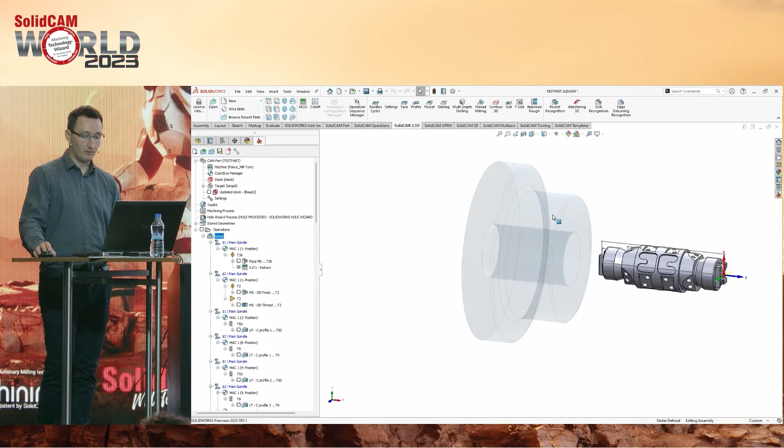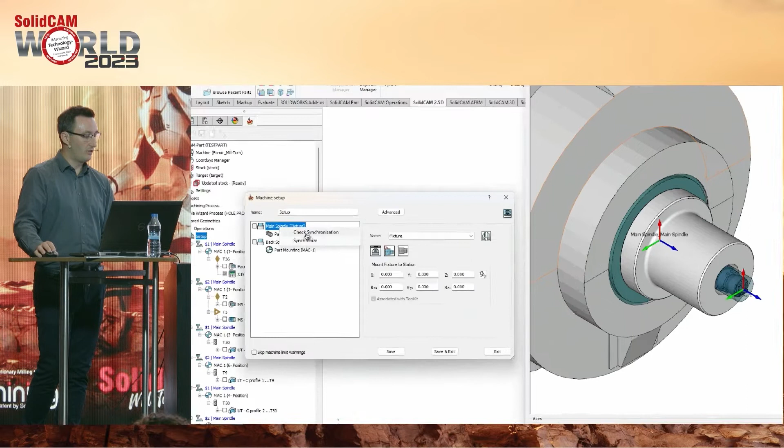I have a different fixture in my environment, but still nothing changed in the background - everything is inside the toolkit, everything is there. So still my previous fixture is there. But you can right-click inside the setup, check synchronization, and synchronize. This is one way to do it. Another way is to just right-click here - you have two new options: check synchronization, which marks that something has to be changed, and then you can synchronize it. Behind the scenes, we are repicking the stuff, paying attention to where my part mounting is, and everything is updated for you.

Thank you for your attention.

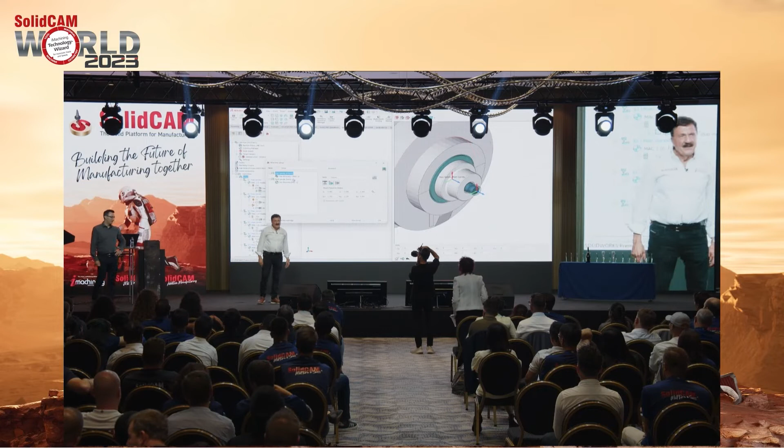I want to tell you something about this demonstration. When people at Citizen, who have been working with Esprit all their life, saw it, they said, unfortunately, we are working with Esprit. Let me tell you the story of Esprit.

Esprit was the king of CAM for many years. Then the owners made a huge mistake. They had to upgrade Esprit, but instead they said, no, we'll write a completely new program called Esprit TNG, 10 years ago. They decided not only to develop a new CAM system, but also a new CAD system, instead of thinking, why don't we integrate? So for 8 years they tried to develop this Esprit TNG, and it didn't finish.

Full of bugs, problematic. Meanwhile, what's happening with regular Esprit, now called Esprit Classic? No changes in it for nearly 8 years. So they are stuck with Esprit Classic, which cannot be updated, and Esprit TNG doesn't work. So what did they do?